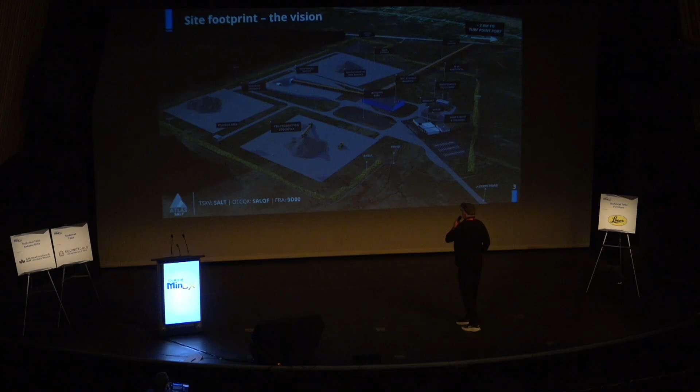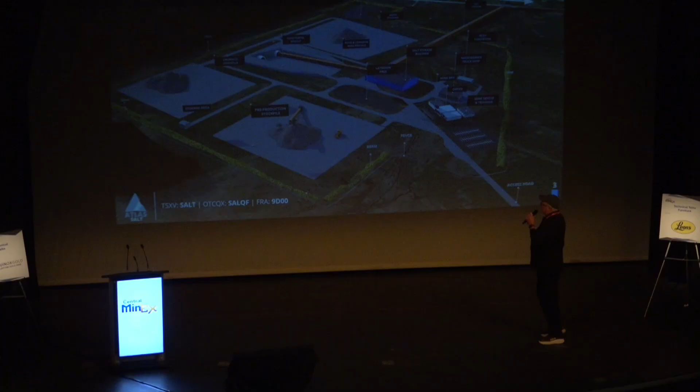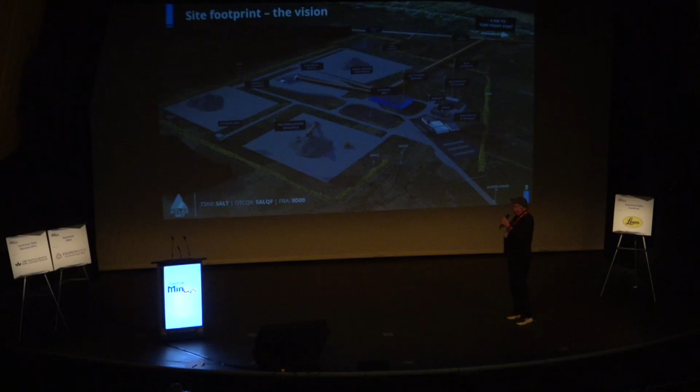So here's the layout, what we're proposing. Access road into the site. We're very close to St. George's. Very small stockpiles. The only waste stockpile we have is for the organics and what we have to do to drive the twin declines underground. You can see up to the center left the twin declines. One decline is going to have a conveyor system running down 1.5 kilometers underground to the infrastructure area for sizing. And the other one is for access to the mine.

So what's happened in the last year? I was here last year talking about this. We had just finished the updated feasibility study. And we had finished the geotechnical work. Terrain and Gemtech and Logan Drilling helped us with that. We've secured relationships with Continental Conveyors. This is really a logistics project per se because of the lengths and distances of the conveyance systems. The underground feasibility, SLR updated it. It was just about done about the time I was talking here last year, but I've got some updates.

Sandvik has come along and bumped their financing for equipment from 73 million to 132 million. So we have that relationship well in hand. And that's going to take care of everything from ground support to automation, which is going to be a big part of our project. The other components, land acquisition, although the mine site itself is on 38 hectares, we bought up a lot of the property all the way around and obviously all the surface leases and mining leases. And we've negotiated with Newfoundland Power. We have that all set up when we start our execution.

So what changed? There was a feasibility done in 2023 just before I arrived at Atlas Salt. We went from mining 2.5 million tons a year to 4 million tons a year. So that shortened the mine life by about 9 years of the proven reserves. It made a huge difference in terms of the profitability of the mine. The design of the declines had to change. So we did that geotechnical drilling I was talking about with Gemtech and Terrain, and we found some surprising results that we needed to de-risk, and we had the time to do it, and I'm going to talk a little bit about what that looks like.

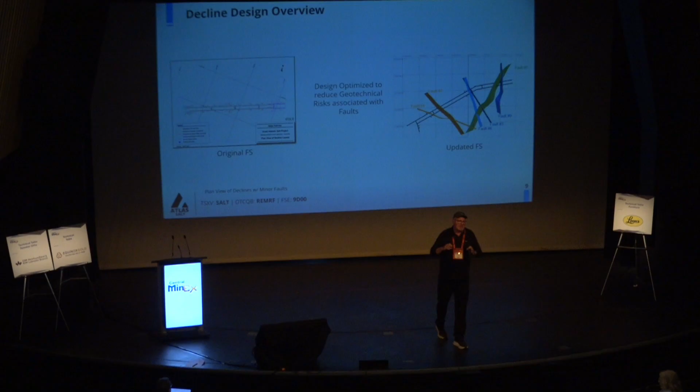So water is very bad for salt. What we've done is taken care of it with the hydrostatic shell around the access to the openings to mitigate the amount of water that can make it down there. Even if we do run into some water, we're in a situation where we have an NHL pumping system.

And I'm not talking about Toronto Maple Leafs NHL, I'm talking about Stanley Cup champion NHL. Who's going to win this year, I don't know.

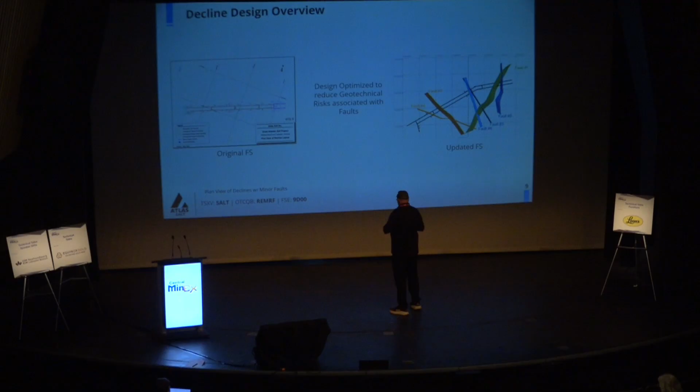So this goes back to the faults here, right? This was the original plan. I don't know what I'm doing here. Go back. The original plan had us just doing 2 straight declines. You can see we have to put a dog leg in because of the location of these faults. So no problem. We get the data, we understand what the problem is, and we mitigate the risk.

So this is where we talk about the hydrostatic shell. So what you have here is the same methodology that was used at Kilroot mine, in Carrickfergus in Ireland. Kilroot mine is a salt mine just north of Belfast, which is considered to be our sister mine, typically because of the ground conditions that they went through and the type of mining plan they had in place. So a lot of what we've done was modeled on the lessons learned from Kilroot mine.

And very early in the process, they switched over to a hydrostatic liner, hydrostatic shell. And what's involved here is it's a full circular. So just picture a concrete pipe, 8.5 meters or 9-meter diameter going right down. And we're going to have to hang the conveyor system off the back here, which is an engineering feat in itself.

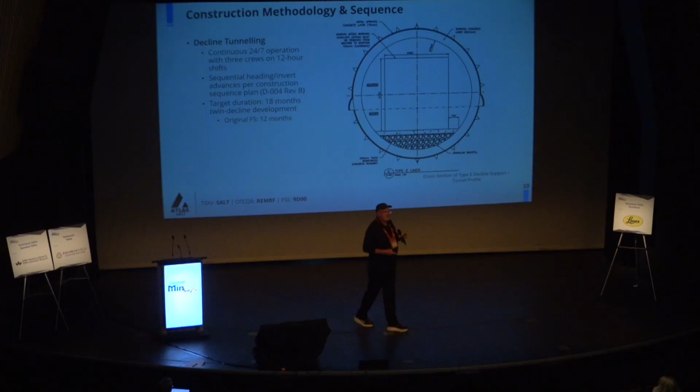So having the right design in place to deal with this, and then you fill in the bottom. So this is much more expensive, and a big part of where the CapEx went up when we updated the feasibility study. But money well spent in the extra engineering we did.

We brought in Shafts and Tunnels, who did the work at the Kilroot mine in Ireland. And when we were up in Ireland, we had lessons learned with the management team in Ireland. And after several Guinness, we took back all the information we needed to be able to apply this to our project in a sober manner.

Okay, so you can see here the excavation method. There's no jumbos, there's no big road headers, continuous miners. It's essentially a John Deere backhoe that picks away at a small portion of the face. And why do you think that would be? Collapse with water, right? So you only want to open up very small openings.

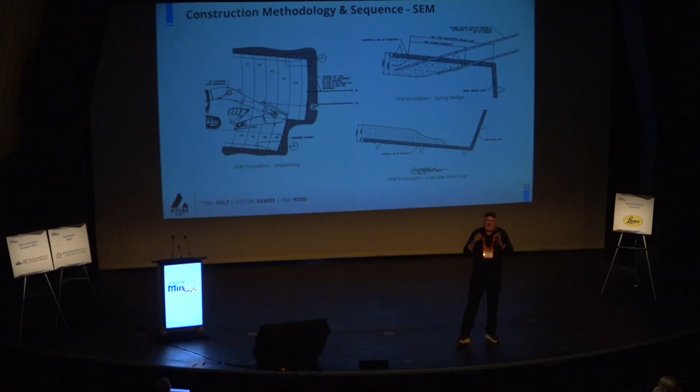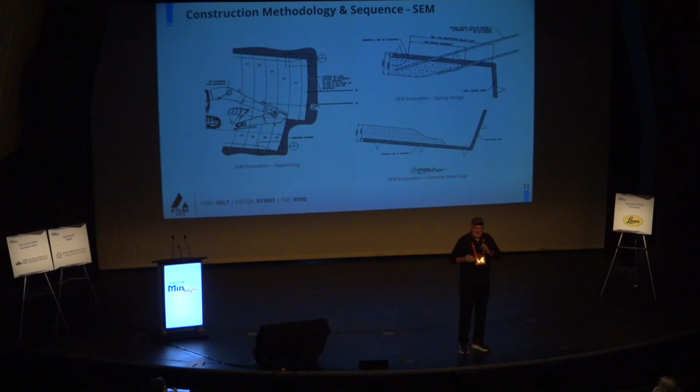I had this situation where I put in a raise borehole on this other project. It was 1,000 feet. And the pilot hole for the raise bore was making about 8 gallons a minute. So we said 8 gallons a minute, not a big deal. Well, you put the reamer on and go 18-foot diameter, it was making 2,500 gallons a minute.

So what we had to do was stop and pressure grout and create a grout curtain all the way around this raise. So very similarly, this keeps on jumping, I guess I'm moving my hand here. What we don't want to do is open up too much ground at once. So you put in your preliminary liner, then you go to your secondary and primary liners after that. And they will vary between 300 and 600 mil.

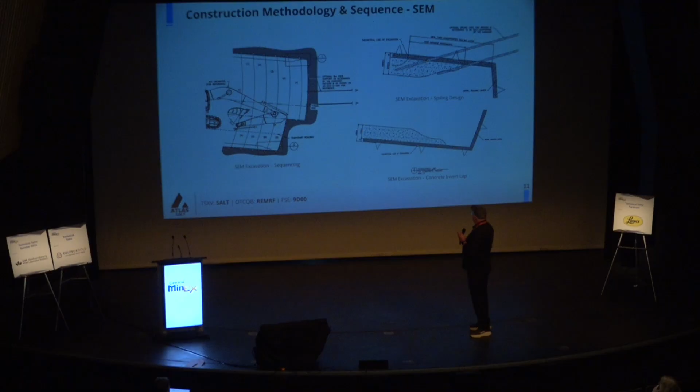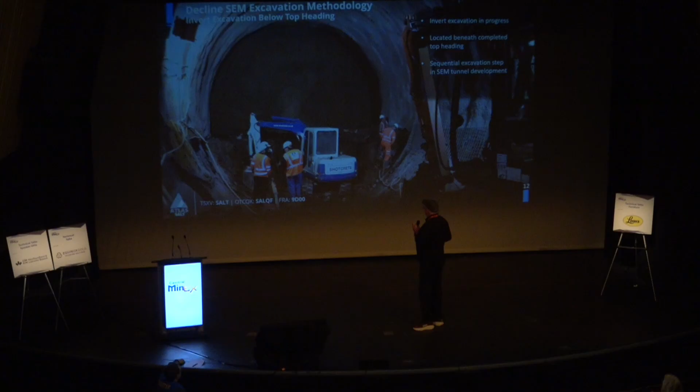And that just shows you a sequence of how you pick away at the face and the advanced work you do for spiling to protect the ground ahead of you. So this is what it looks like. This is a shotcrete machine working at the face. You can see you've got the backhoe back here to the right. And you just pick away at this, and it's very specialty shotcreting. This isn't your average shotcreting.

You bring in a crew in a hard rock mine that might not have the right amount of silica fume, and it's not going to make a big difference. This has to be very much on spec for anything we do, and this is the end look of the decline. This is the Kilroot mine decline, and that's essentially what our declines will be looking like.

Okay, what's happening now? So our early works is underway, so we cleared the land. We did this before the snowstorms. There's some before and after. And part of it was we salvaged all the trees. I heard the community people talking earlier about people cutting down trees and where can they get their trees from. So we went to the community and we lotteried off all of the wood. And 21 loads went into the community, mostly to seniors, indigenous, and veterans, right?

And that's just an example of, you know, we're early on. What can we do to help the community while we're building this mine? Okay, so what's the next steps here? So the early works is in progress. We've got to get into a little bit of detailed engineering. We have some Canadian Tire money right now that we have to use. And so we're just being very specific on what engineering we go after.

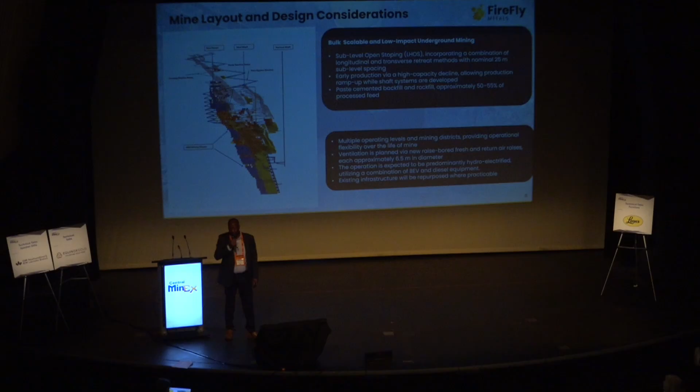has a lot of acid generating material. But also from a construction perspective, we wanted to make sure that we've got places where we can bring forward material to use for all our platforms, our pads, our road constructions, and all the things we are going to need material for. So part of positioning it there was to make sure that we've got access to that material. That's a high-level overview of the mine itself, without going into too much detail.

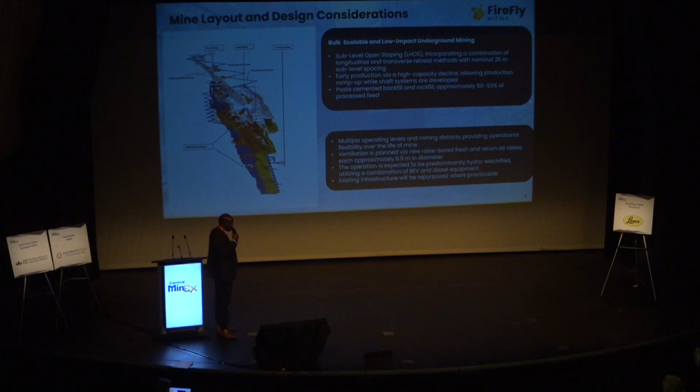What you're going to see is the bypass ramp, which I showed you, as it loops down and connects up to the ore zones, which all sit here. These top sections here are already mined out. That's the historical mine, and our footprint is all targeting this area here. We will use existing infrastructure where we can, but we're also looking at putting in new ventilation shafts so that we can increase the volume of air down there.

And eventually, we are looking at putting in quite a significant, almost 3,500 feet shaft down to the bottom of the mine, which will be the future production shaft for bringing the ore out. So the decline allows us to have early access to ore, and the shaft gives us the sustainability, the long-term access to all these deeper sections of the mine, which will be mined for, I guess, many years to come.

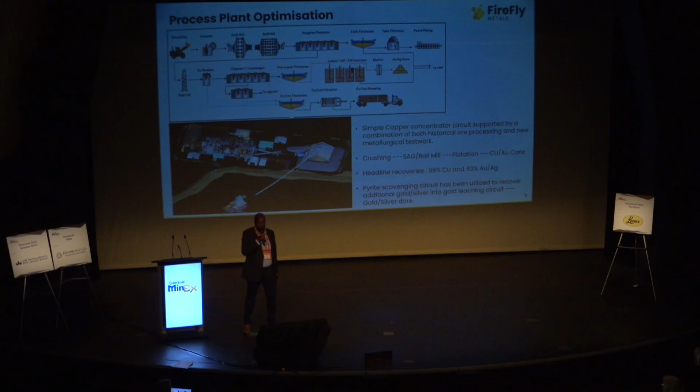The process plant was a lot of, I guess, historically known, because we had the process plant at Nugget Pond, but Gerard and the team optimized through additional test work to see what we can actually push the process plant to. And one of the key additions which we have done to the process plant is to make sure that we actually maximize gold recovery. I spoke about the 30 to 35% contribution of gold at the current gold market price.

So our flow sheet and our design for the process plant is a typical process plant where we have got feeding from the ROM pad into a primary crusher, SAG, ball mill, flotation, and thickening and getting us concentrate. But one addition is that we are going to scavenge off what we call our pyrite tailings, for the metallurgists and processing guys in here, which will then leach for gold. And we'll have 2 gold streams, some gold in the concentrate, but we're actually going to make gold doré on site as well as part of this modification which we have done.

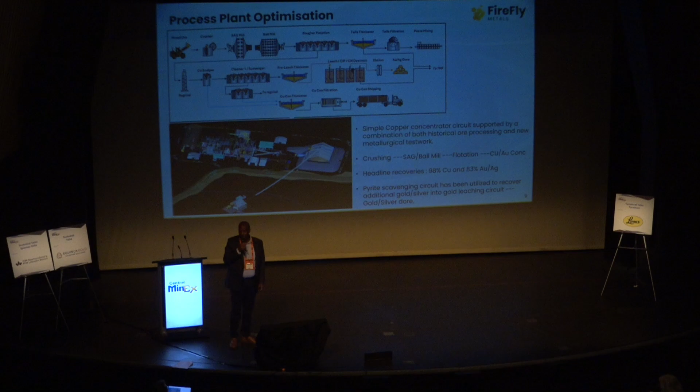So this is quite an efficient process plant. There's a 3D visual which I've put in there where the crushing is, the stockpiles. You'll see there part of our optimization process was to make sure that we've got a compact design of the process plant, which is neat, then the material flows pretty easily. Maybe to highlight there that some of the test work and the design criteria which we are using, the recoveries, we're looking at 98% recovery for our copper, up to plus 83% gold recoveries through this designed process.

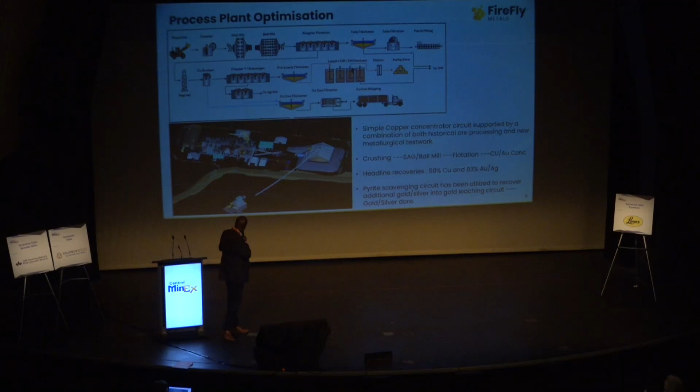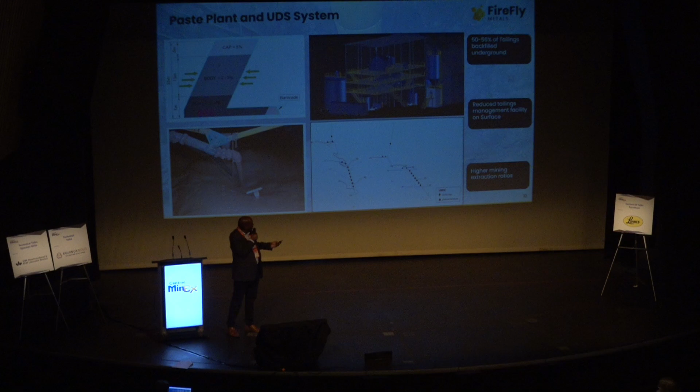I spoke about the importance of the paste backfill, because it's a significant addition to our design and layout of the mine. What the paste plant does and why it's so critical is that it's going to allow us to backfill almost 50 to 55% of the tailings material which we are going to generate over the life of mine. The impact of that is that by backfilling that underground, it allows us to reduce our tailings footprint. But also, it allows us to have significantly higher extraction ratios.

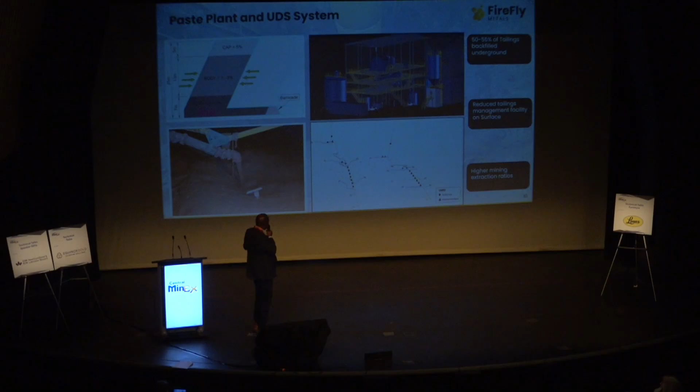It means that we are going to mine way more from the resource, less pillars we're going to leave underground because we're going to be using this paste backfill. Something which I guess was not part of the previous plans, but something which will really add a lot of value going forward for this project.

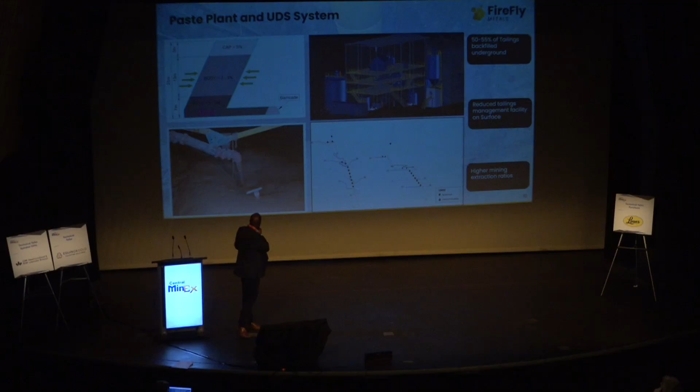Okay, sorry. All right, I'm just gonna get everything out there.

So I was saying, aggregate quarry within the tailings dam itself. I've already spoken about the location of the tailings, that we looked at various locations before we finalized on this particular one. So one of the things which we also considered is that we've got a lot of legacy areas, existing potentially acid generating waste rock on site. And part of the design consideration was to incorporate using some of that material, cleaning up the environment, using it as an inner liner which is going to be submerged within the tailings dam, thereby allowing us to rehabilitate some of the legacy issues within the project footprint.

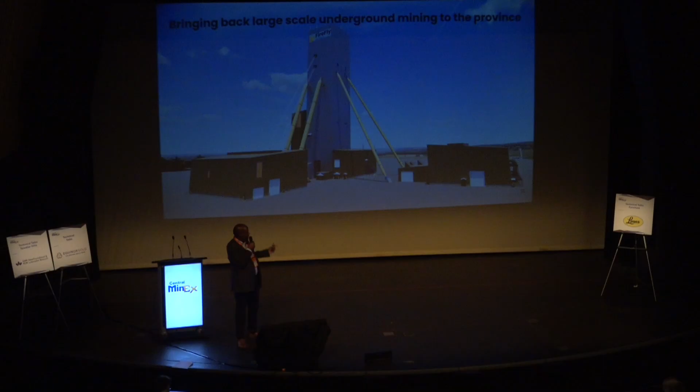So this is what I believe the future will look like, where we are going to bring back underground mining, and this project is going to be a significant flagship in terms of bringing back underground mining onto the island and onto the province. I know that there's mining happening at Voisey's and others, but this is different in that in the future we are going to go back to the old days of Buchans where there were shafts, and go back to being leaders in shaft mining into the future.

And that's what I had for you, and hopefully in the coming presentations or next time we will have all our project economics numbers available to share with you guys.